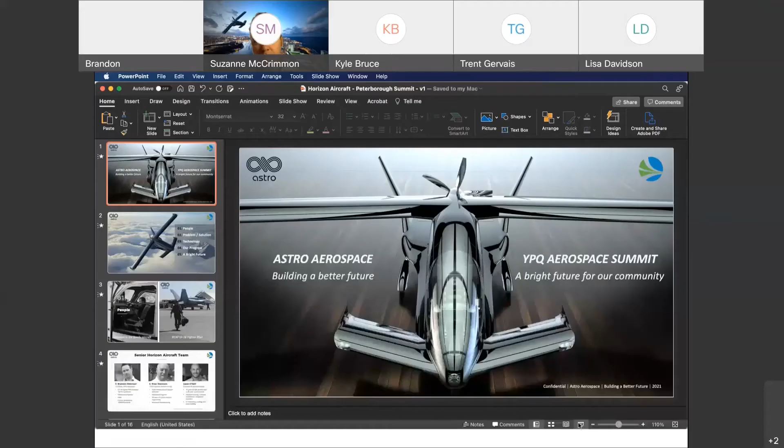Kyle, thank you. Okay, awesome. So you heard about Horizon Aircraft, that was a company that myself and my father co-founded back in 2013. And then we were recently acquired by Astro Aerospace. So now, officially under the Astro Aerospace umbrella, so Canadian-owned, a wholly owned Canadian subsidiary of Astro Aerospace. And this presentation will be about how we're building a better future right here in our backyard. Really, I'll try to put a spin on it to show how, I'll foot stomp this, we're trying to source local, we're building local, and we plan on staying local. And obviously, Peterborough is one of those really cool places that's kind of at the center of a lot of really interesting stuff.

We'll talk a little bit about the people, so you'll care about what I'm talking about and know some of the key folks helping me out along the way. We'll talk about our unique problem and how we came up with a cool solution, the electric vertical takeoff and landing machine we'll introduce later. We'll talk about that technology, our progress flying prototypes right now, and where we're going in the next year to two years, all under the umbrella of a pretty bright future locally here in Peterborough.

Never give a fighter pilot a chance to talk about himself, and you guys broke that rule. So I get to talk a little bit about me, which is awesome. But fundamentally, all joking aside, this is a pretty cool story about a family business that sprung out of some really cool engineering and a pretty on-point idea.

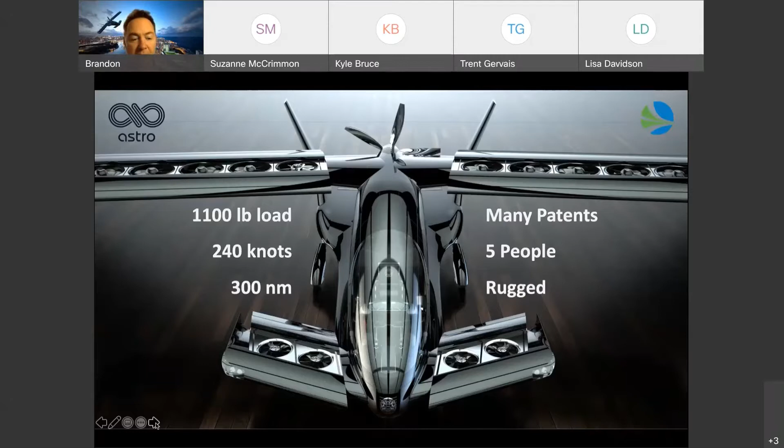Pretty exciting. So you can see that speed and that range, much quicker than a helicopter, much lower operating costs. And this is how it works.

A picture's worth 1,000 words, a video's worth more than that, so 10 to the 6 words or whatever. Here it is in its normal aircraft configuration, just like you saw in the first slide. Obviously, in flight, the gear would be up, but otherwise, this is how it looks when it's flying en route.

When it wants to go into vertical mode, there we go - wings open up, and the vertical thrusting fans engage, and now you can hover, land, again, basketball court, anywhere that's a prepared surface, helipad. Offload your supplies or people, onload your critically injured soldiers or personnel or goods, take off vertically, and then transition back to forward flight in a really efficient manner.

Pretty unique design, and I think in the vertical takeoff and landing space, this is one of a kind, and we're pretty excited.

So that begs the question, where are we, right? Are we just a bunch of really fancy renderings? The answer is no. A bunch of really good engineering has come out of our team.

We're building very quickly now, and we're flying a bunch of subscale prototypes. Our 17% scale prototype has completed 250 successful flights. Our 50% scale, a 20-foot wingspan, 400-pound, much larger machine, will be flying in Q1 of 2022. So honestly, in a few months, the bigger machine will be flying.

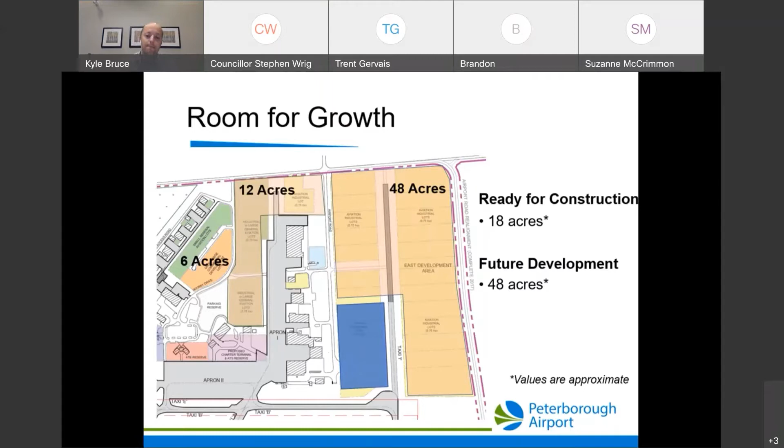Just to have a look at the area, to give you an idea of what we're looking at for those who haven't been able to visit our airport: you can see the areas next to what we call Apron 1. We have our commercial industrial area. The roadway on the left side of the screen is Airport Road, and to the left is our industrial area. Over to the right, where the general aviation hangars are, we have approximately 30 private hangars.

Since 2008, there's been an approximate value of 43 million invested in the airport, including 15 million from provincial and federal governments. There's been an increase of over 200 FTEs, full-time positions at the airport over that time, and approximately 30 of those general aviation hangars have been constructed over that period. The change in GDP from 2009 to 2016 is estimated from 43 million to 73 million, as direct and indirect output for the airport.

Just to give you an idea of the ownership that we have, this picture is a little bit outdated. It doesn't have the Flying Colors Taxiway India construction on the right, but part of that area on the top right, or northeast side of the screen, is what we have positioned for future industrial development.

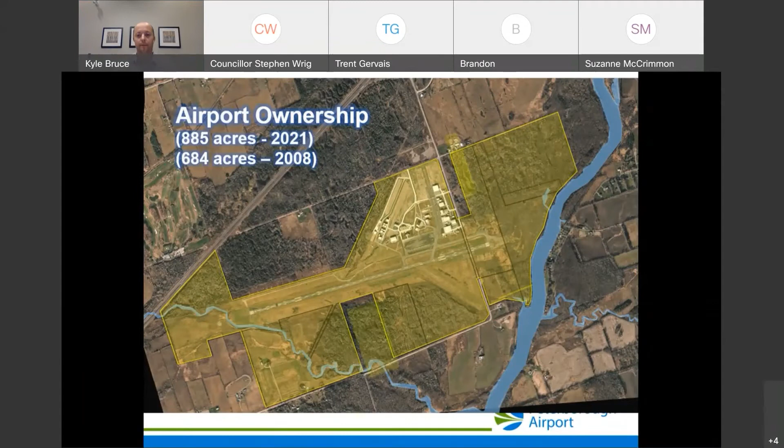Some exciting changes happened over the past couple of years. Kate will be able to share some information on the Flying Colors new facility. Servicing was connected to the east side of Airport Road, and a water fire reservoir was constructed, which is a water tower to increase fire response capacity.

Both of our runways had their displacements removed to make the landing surfaces usable for full length, which increases capacity for landing aircraft. There's new construction of Apron 4 and Taxiway India, adjacent to the two new Flying Colors buildings, as well as installation of backup gas-powered generators.

Essentially, our airfield circuits, operations center, and terminal building are all on backup power. Being natural gas is excellent redundancy compared to diesel. When you do get into certain events, diesel is typically hard to come by in these situations if it's wide scale.

Some other exciting things on the move right now: we're working with our city GIS team to utilize LiDAR data and apply it to obstacle management in the vicinity of our airport. Part of this is rendering 3D models, applying different surfaces so we can proactively get ahead of natural growth around our field, as well as provide oversight to ensure no new obstacles are constructed. There's a lot of great work going into this, and we're positioning ourselves to do this work in-house through various tools that let us dig down and actually pull elevations on individual trees if we want to.

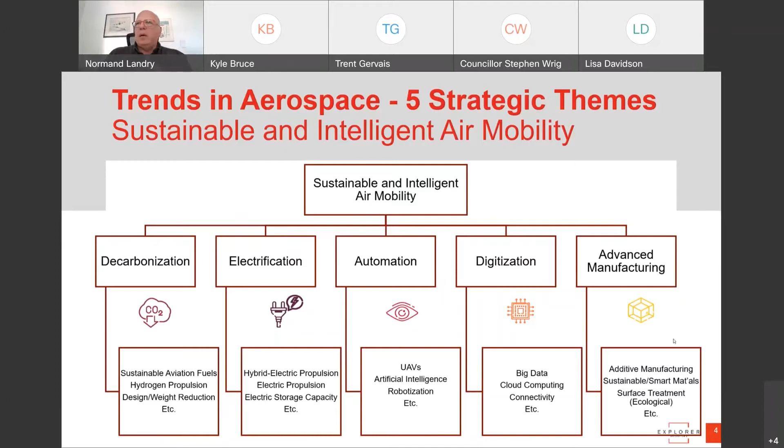So we'll talk today about some of these challenges and opportunities. These are the ones we've selected to talk about, as they are, in my opinion, the predominant ones in the industry right now, and those with the most visibility.

So let's talk about automation. We've already seen an increased amount of work for robots that are working alongside people, whether they're taking on physical or repetitive tasks at an airport, or providing an actual service. We already have examples of some of these robots in operation - whether to deliver food from an airport restaurant to a customer somewhere, automated floor cleaning, or luggage carrying capability.

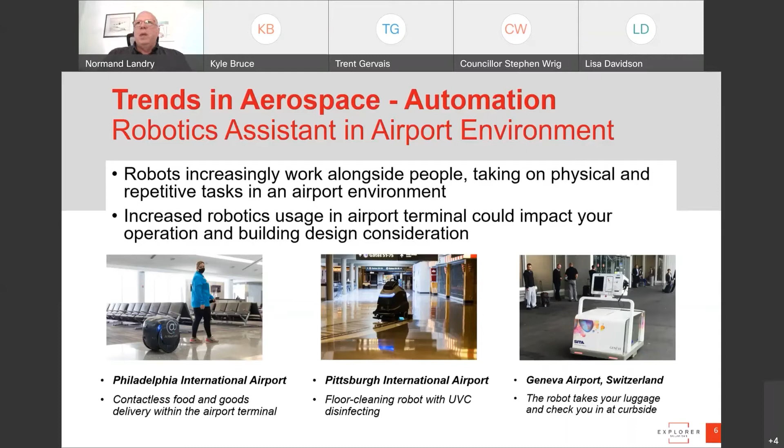So that was inside the terminal, but the airport is really also a great environment where to develop, trial, test, and certify - and I'll use certify in a loose term - all the equipment that can be used to support aircraft. So whether we're talking about a remotely piloted boarding bridge or an autonomous bridge, or shuttle buses that are electric and fully automated that can move around the airport between the aircraft to the terminal or between stations on the airfield.

If you look, for instance, in Louisville, Kentucky, the UPS group already has such a bus system for their employees. It's a huge compound complex, and that's how they move employees from their parking to their work site, because sometimes it can actually be quite far.

Automated, or in this case, semi-automated tug. A number of those aircraft tractor services have been developed over the years. There are some that are fully automated that resemble the actual tow vehicles that we see today at airports. Some are a little more slick, slim, and electric, and provide quite a bit of horsepower to actually move aircraft around.

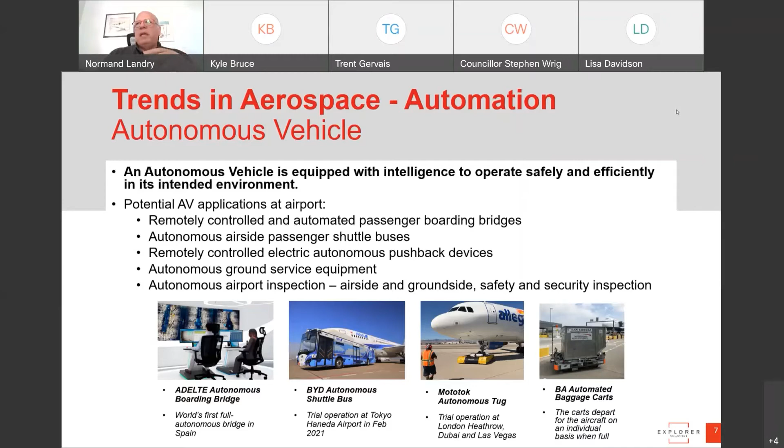So those are all things that are in the works, coming to airports, and that will change how airports operate, their requirements in terms of control, in terms of handling of those capabilities.

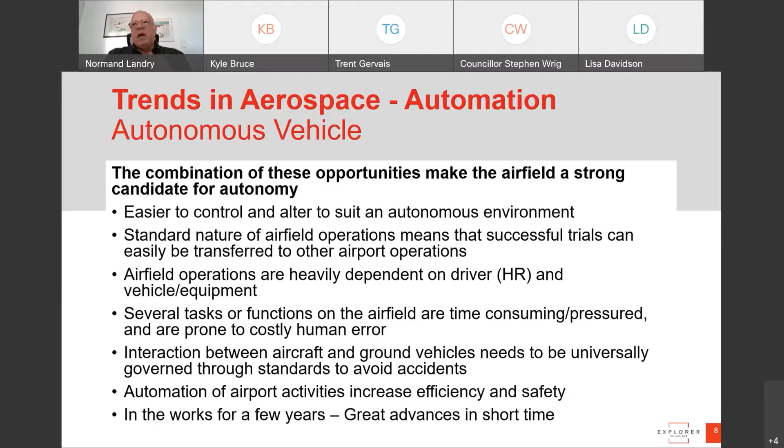One of the reasons for having automated equipment operating on the airfield is to increase the level of efficiency and safety. Currently, for one part, airfield operations are very human resource dependent. So if we are able to automate a large number of those activities, that means we reduce the number of human resources we need, the number of people we need to operate these vehicles. Also, given the fact that humans are prone to incidents and accidents, it is bound to increase the efficiency and the safety of those operations on the tarmac.

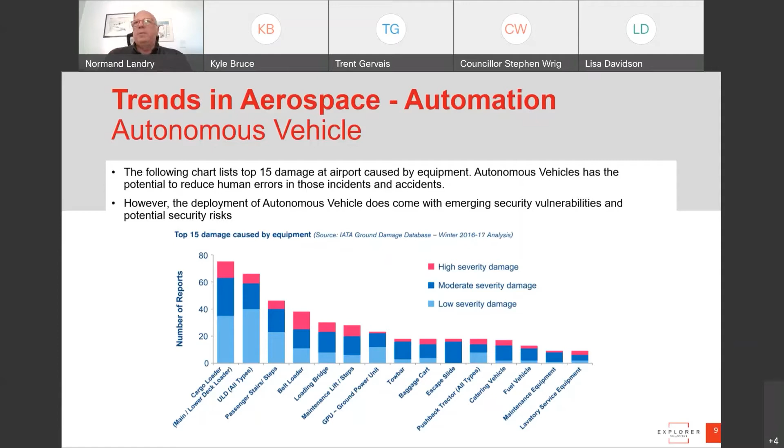So digitization, the use of cloud computing. That cloud computing is combined with big data in terms of storage and data management. And that allows companies to adopt a wider range of technologies, including machine learning, augmented and virtual reality, and all sorts of other analytics.

What it also allows airports and airline companies is to use facial biometrics, facial recognition that further reduces human interaction. So you could have somebody whose biometrics are associated with their passport, and as soon as you enter the parking or get off the bus or the taxi, your face alone would determine, and your biometrics would be linked to knowing that you have a ticket, knowing that you have a passport, and following you all the way through the various gates you have to go through before you actually board the airplane - putting your luggage down, checking your luggage, going through security, and then getting to the gate, and even getting on board the airplane. The only thing this would unlikely do is perform customs operations.

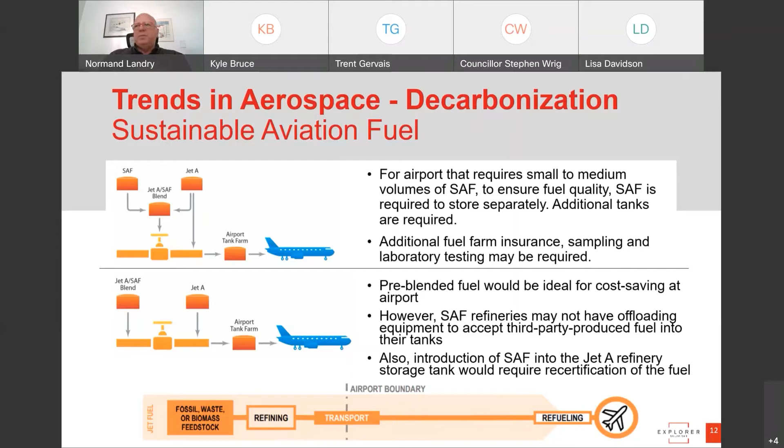Alternative aviation energy sources are also another way to look at reducing greenhouse gas emissions. I'll show you the various steps electrification can be used for, to reach near zero gas emissions, because electrification is not necessarily applicable to all types of airplanes.

Airbus has developed a hydrogen combustion gas turbine engine that will use liquid hydrogen as fuel, using it directly into the engine to power it. Boeing has looked at a fuel cell demonstrator, so basically generation of electricity through a hydrogen fuel cell.

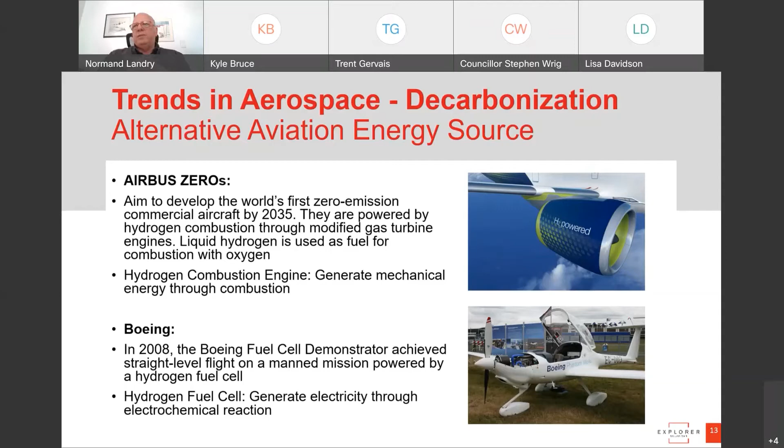There are some challenges with hydrogen. Obviously it's a gas, so there are safety concerns that need to be looked at, in storage, as we refuel it, and as we create it. In order to liquefy it, we need a liquefaction facility for cryogenic hydrogen use at airports. The physical delivery of hydrogen from tank farm or liquefaction facility to the aircraft may also be challenging, so processes need to be put in place, and switching from current fuel to hydrogen is also a bit of a challenge for engine manufacturers.

Right now, there are a lot of companies like Pratt & Whitney working with Boeing, Airbus, Bombardier to develop the aircraft and the storage on the aircraft, which is a challenge in itself, to actually use engines powered directly using liquid hydrogen.

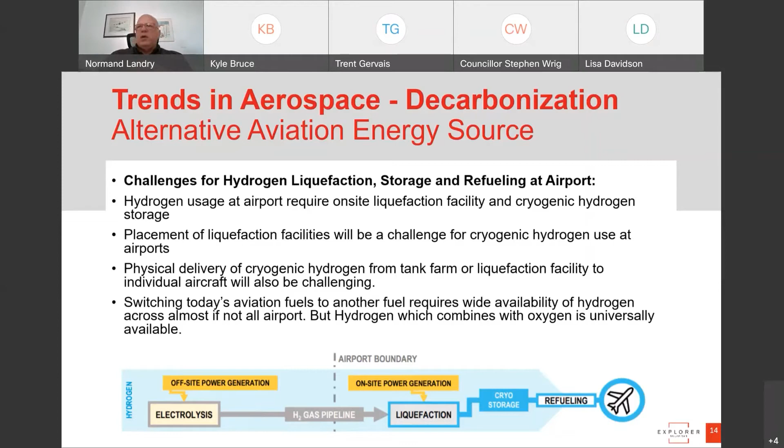So electrification here - there's a huge trend on electrification. Right now, fully electric aircraft are anticipated to be used on smaller airplanes, maybe up to 9 PAX aircraft, just because at this point in time, to get some kind of autonomy, you need larger batteries. Large batteries mean weight, means less time in the air. So there's all these elements that need to be considered.

So you already have a number of aircraft that are used for pilot training. Pipistrel is being used in Southern California, has been used for a couple of years already. Pipistrel aircraft is coming to flight schools in Canada. There are some grants and loans that governments have put in place to support procurement of electric aircraft for pilot training.

And we have a number of small aircraft also that have been developed or are in development. Harbour Air in Canada, in Victoria, is also looking at electric Beaver ready for certification in a couple of years.

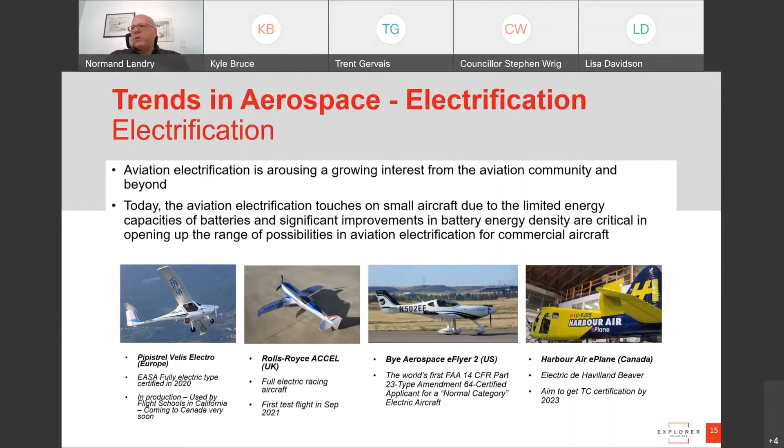Alice is also a 9-passenger airplane that has been purchased and whose certification is being finalized right now, and it's going to be used by a US-based company in Massachusetts called Cape Air. They've already ordered 75 of those aircraft, $4 million each. But they figure that this is going to be the future of their operations out of Cape Cod.

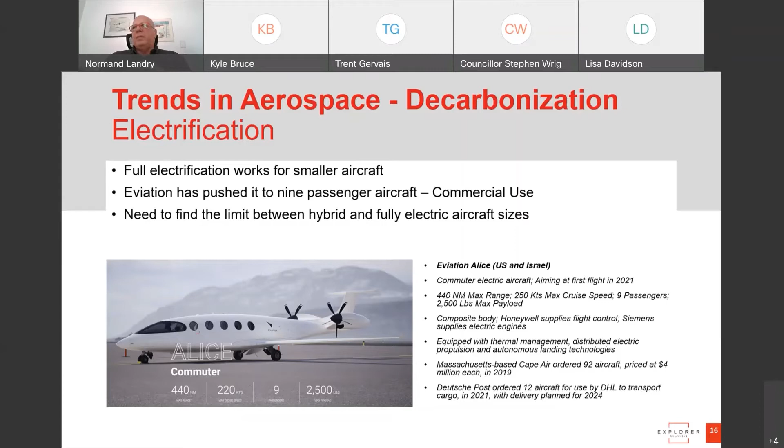Some challenges with electrification. Apart from the actual manufacturing, for airports that means you need to make sure you have enough electricity to actually generate the electricity needed to charge these airplanes. Currently, every facility has the limitation determined by their operations. So we need to develop efficient battery recharging processes, safety procedures, standardization of charging protocols and procedures, and ensure we're able to meet the electricity requirements from the grid.

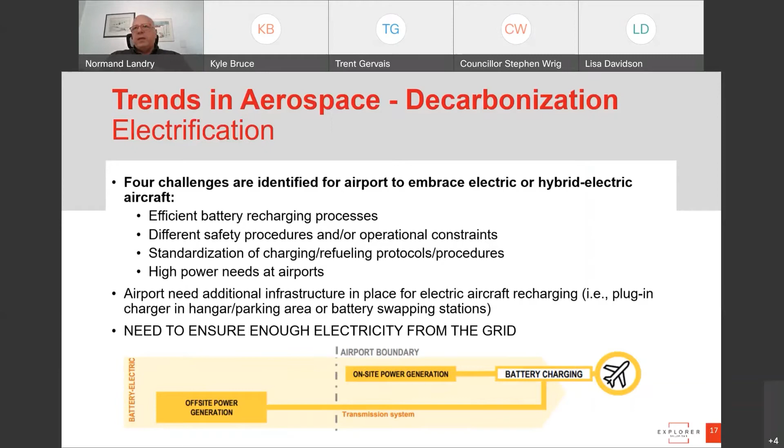We talked about urban air mobility. Not sure if we have the same number, Brandon and I, but basically the trend is that the world population of cities is going to greatly increase over the next few years. So that increase of population means increased traffic, reduction of efficiency in terms of traveling.

So urban air mobility would be a great asset in transporting people from somewhere in the city to the airport, for instance, or to work, and then from the airport to other locations, whether in a given proximity or not. And then some of the urban air mobility platforms would provide longer distance capability where they could travel between cities or nearby cities and offer some regional air travel.

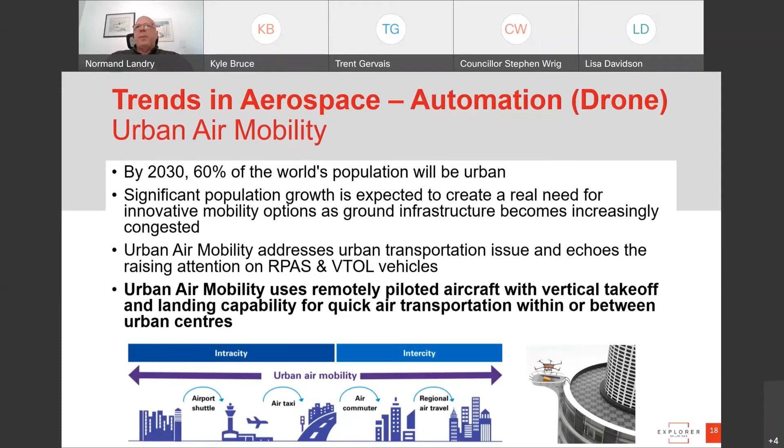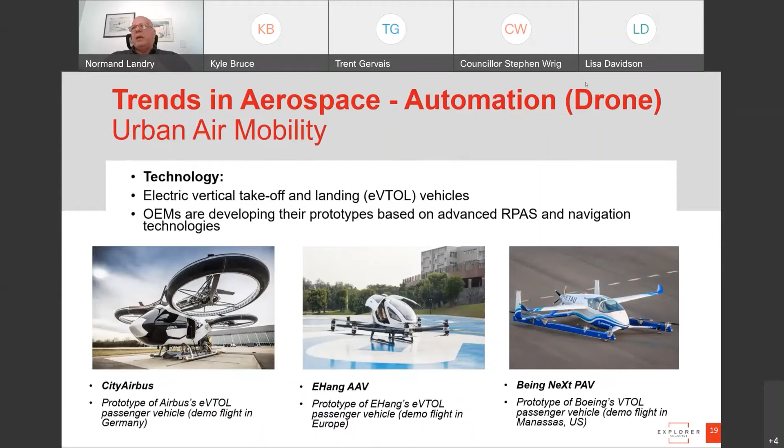So we look at different technologies. Brendan, I'm sorry I don't have yours in here, but I have a few that exist right now around the world - whether they've been created by Airbus, by Ehang, which is a Chinese company, or by Boeing. Some of these already exist and are being tested. Bell Helicopter is also testing one of those.

Some infrastructure requirements here. The platforms are one thing, but we need to have places to land in the city, places to land at airports. We need to be able to integrate these machines into the air traffic management system, whether they are separate or integrated with the current air traffic management system. That's currently in development and being looked into by NAV Canada and Transport Canada.

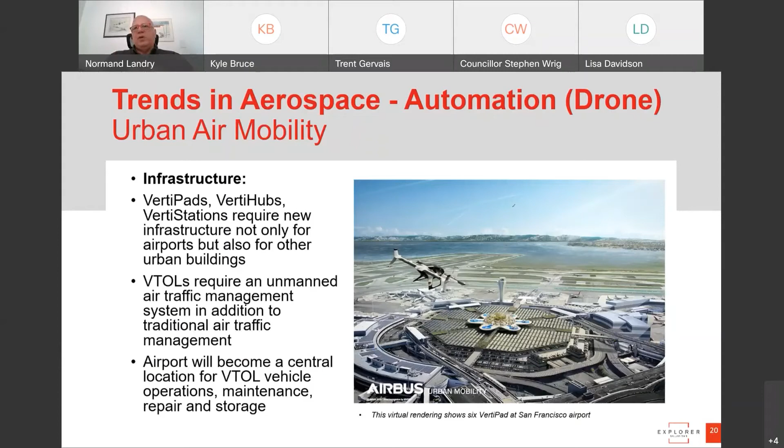I just want to share with you a couple of case studies very quickly. We worked on a project a year and a half ago now, and the idea here was for this company that was transporting human organs from hospital to hospital across the US. They were engaged, and they're still engaged, and they've successfully actually done some of that, but they were engaged in automating and electrifying aircraft.

So basically they've used aircraft. Their first step was to use existing helicopters that were gas powered, converted them to electric aircraft so they could do some testing, and in parallel develop currently piloted-assisted, but certainly remotely or certainly in time fully automated electrical vehicles that would leave the hospital with an organ, go to a hub at an airport where the organ would be transferred for a longer distance to be traveled using a combination of vertical fixed wing type vehicle, reach the other hub where it would be transferred onto another VTOL to actually deliver for final delivery of that organ to the destination hospital.

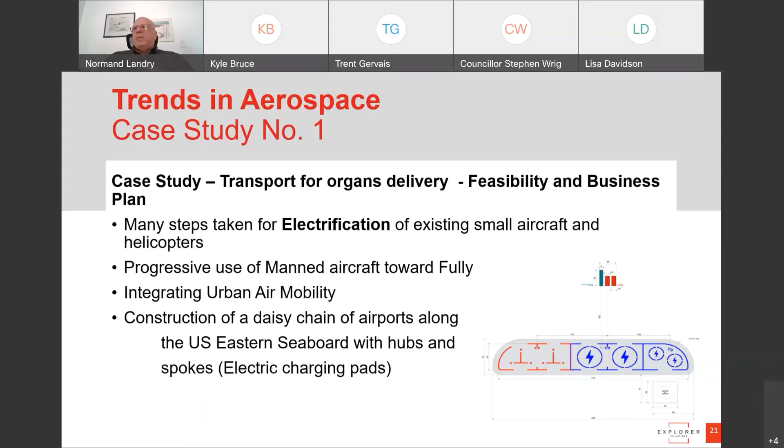So I think I've said everything here. The other case I want to show is we've worked with an airport in St. Hubert to put in place an innovation hub. The idea is to create a zone where you'd have together manufacturers, research organizations, universities, and add on a living component to this.

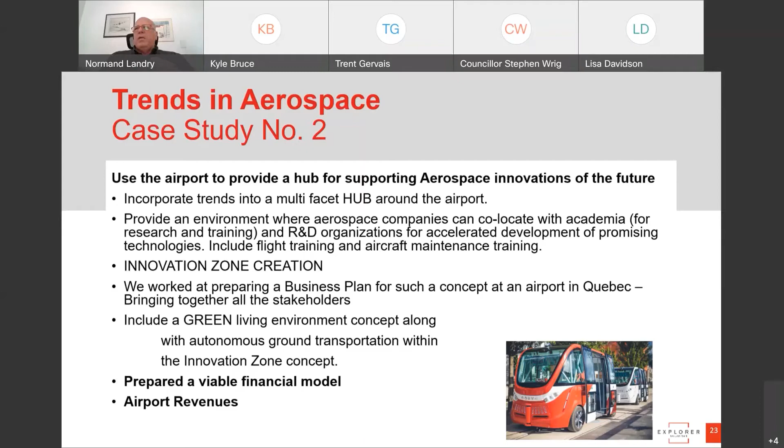Apartments for students, apartments for workers, entertainment facilities, and so on. All these places, all these components of that innovation zone linked from one place to the other using automated electric vehicles. Again, using some airport land to create airport revenues, and at the same time developing an ecosystem that provides larger opportunities for development of new aerospace products.

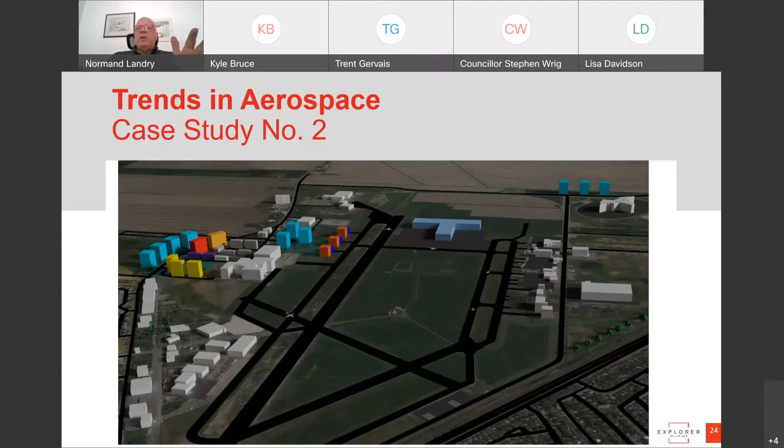And this is all I have this morning.

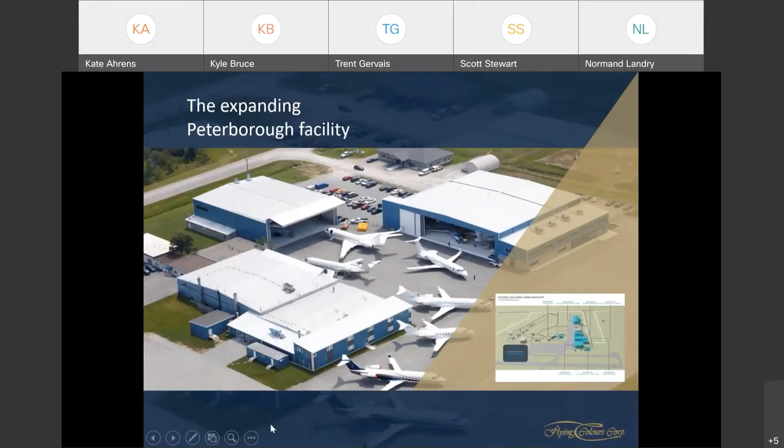For those not familiar with Flying Colours, we are the anchor tenant at the Peterborough Airport, and we have 2 other locations, one in St. Louis, Missouri, and one in Singapore. We have just over 450 employees worldwide, and we pride ourselves on being a one-stop shop, offering our customers a wide range of aircraft services. We have been in business for almost 40 years, and we complete mid to large size business aircraft.

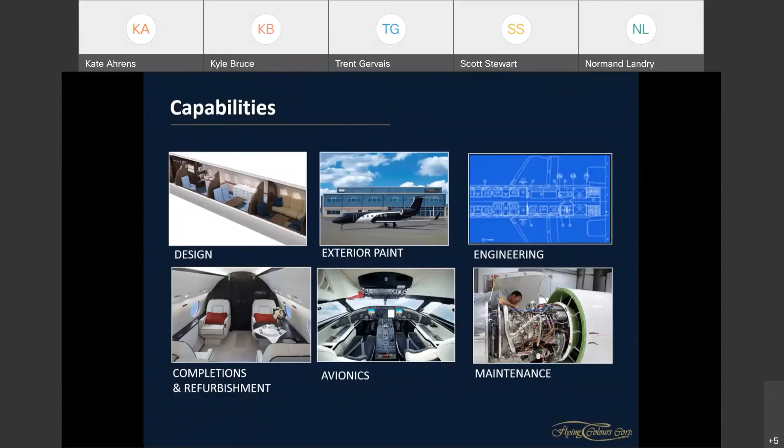We are a Bombardier authorized service facility and preferred completion center for their completions and warranty. We have trained certified technicians for fixed wing, turboprop, and rotary aircraft. We are an authorized service and distributor for Collins Aerospace, Honeywell, C&D Aerospace, Safran, GoGo, Viasat, BE Aerospace, Satcom Direct, and others. Our in-house capabilities for engineering include mechanical, stress, and electrical.

Our current projects right now are mainly the Q400, special missions, multi-completion, and configuration, as well as the Global 7500 VIP completions and the Global 6500 VIP completions, as well as special missions. We also have a variety of mid-range refurbishments and exterior paint projects in-house.

During the last 12 months, we have welcomed a cascade of new projects driven by regular customers and an increase of new ones. Our state-of-the-art paint shop that you can see in the picture here opened in 2019 and has been operating continuously ever since.

In August of this year, we finished our most interesting paint application for our Gulfstream 650. I mention this particular project as it clearly demonstrates our team's incredible expertise. On completion of this Gulfstream 650 fuselage, it boasts a sparkling mica pearl diamond mine base coat surface combined with an intricate design incorporating curving stripes and complicated swirling patterns. The multifaceted process was incredibly complex, requiring technical expertise and intense attention to detail to achieve this fuselage with maximum ramp impact. The owner was so happy he's going to bring it back for a full refurbishment.

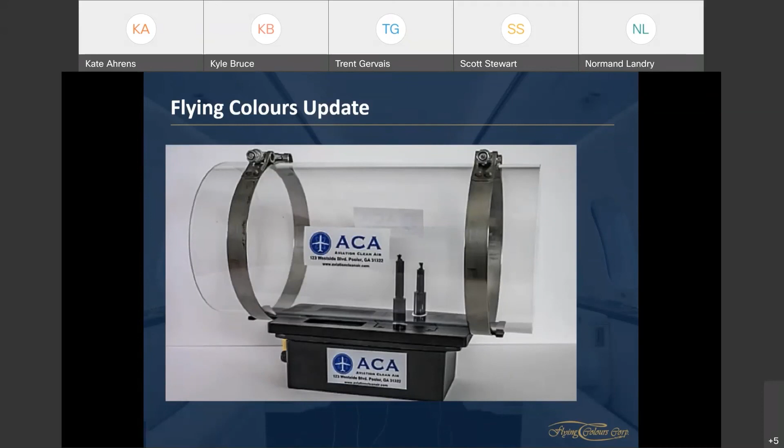So this just gives you a brief conclusion of where we're at for Flying Colours, and I will open it up at this time to any questions.

Oh my God, incredible presentation. Any questions for Kate?

I guess while we're seeing if there's any questions, Kate, my question would be what's next for Flying Colours? If you look out the next 2 to 5 years and you're hearing about all the technology changes this morning, is there anything in the works that would lead you down the path of some of these exciting changes to aviation?

Thanks, Trent. Yeah, we're seeing a lot of trends with refurbishment right now. 50% of our business, we operate with Bombardier Aerospace on the green side of things, mainly for the 6500 and 7500. We're seeing a lot of trends to update aircraft refurbishment, mainly in pre-buy inspections and through customers who have had their airplane for over 10 years, especially on the wellness side of things. So I think that's going to be a big trend, and connectivity.

They're finding their business aircraft such a tool in the air, and there's not a lot of time for travel, so they're really using their aircraft as a second office, if you will. So I think those are two trends we're seeing a lot of, as well as the special missions. Special missions aircraft, I think, are only going to become more of our everyday customer, and really having that multi-configuration gives them options to improve efficiencies.